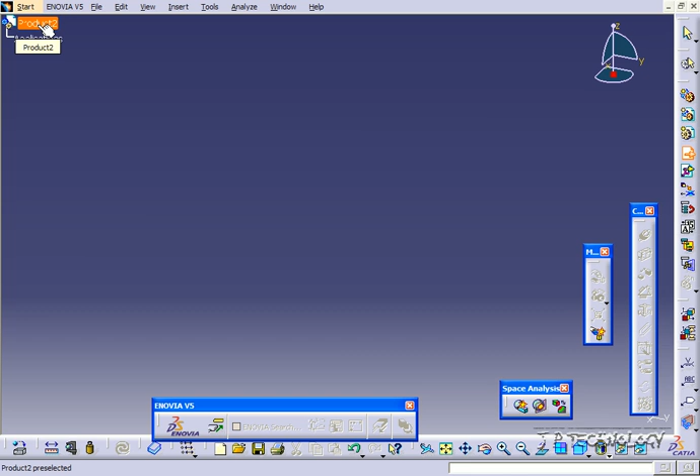Now what you're going to have to do is click the product you want to put it into, so click Product 2, or whatever your product or assembly is called. Now it's going to prompt you to select the part you want to put in. So let's click the base, click OK, and now it's put in the base.

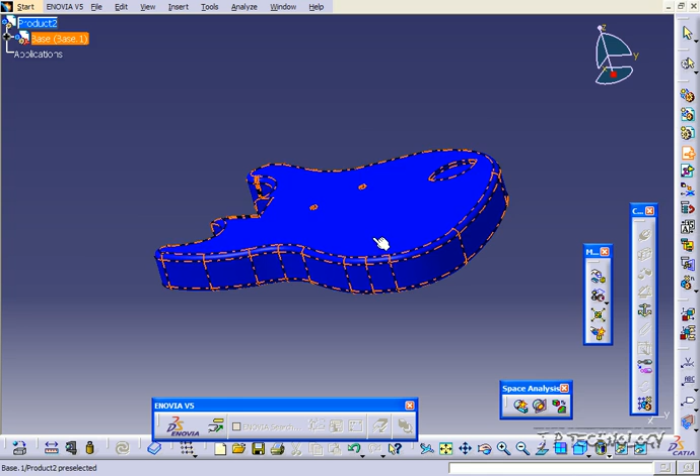Now let's do another existing component. Click Insert, Existing Component, and again you have to click on the product. This time let's put in plate, click open. Now the plate, as you can see, is kind of layered on top and squished into the base. That's one of the problems with doing the existing component by itself: you're able to throw it in quick, but you don't really have a position to throw it into.

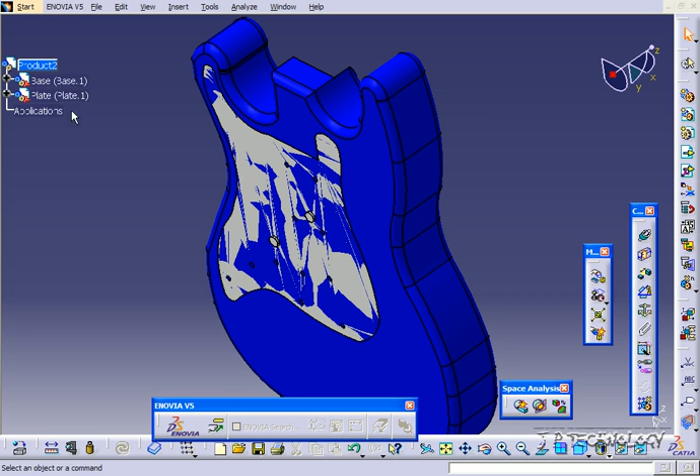So let's delete this plate, and do the same thing, but this time we're going to insert it with position. Click Insert, Existing Component With Positioning, click the product, click the plate again, click Open, and now you can see again it's in the same position. It's kind of the problem we have when inserting components, we're going to have it smushed like that.

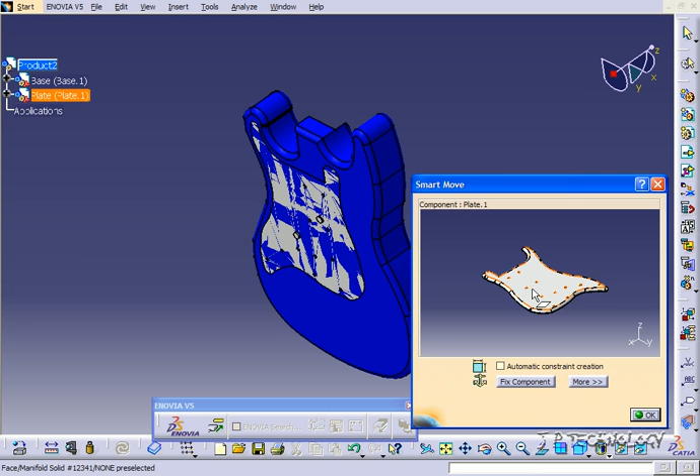So what you're able to do is just move it around in here, toss it around, or click on it and maneuver it around. Once you've done that, just click OK. Now both of them are free to click, access, and maneuver.

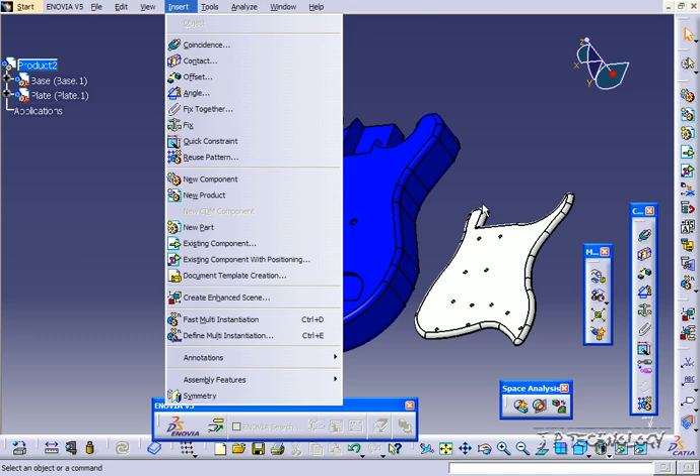So when inserting components, make sure that you click which product you want to put your components into, which assembly, and then insert them. You may need to insert with positioning, as we had to here, because we need to move it around from the origin, since both components share the same space in their own component files. They're going to share the same space in the assembly, so you need to move it around before you actually position it.

And that concludes our tutorial on inserting components within CATIA V5.